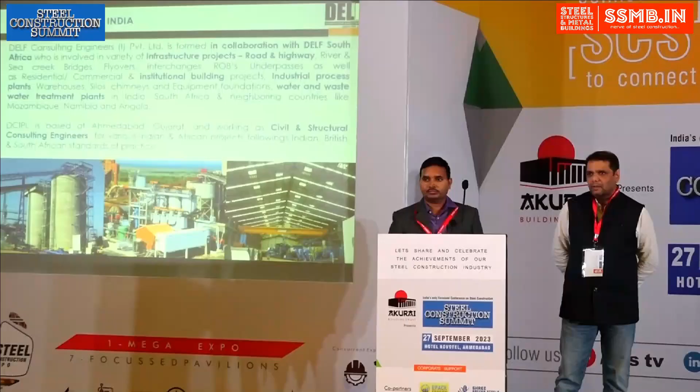Herewith we are presenting one of the state of art and first of its kind projects located at Mundra, Gujarat. It is a 2 gigawatt ingot and wafer plant at Mundra, developed by MSTPL, Mundra Solar Technopark Private Limited. It is part of Adani's Solar Electronic Manufacturing Cluster Zone, a complete backward integration of complete solar solutions, and it is like making India self-reliant in solar projects, an initiative taken up by Adani Group.

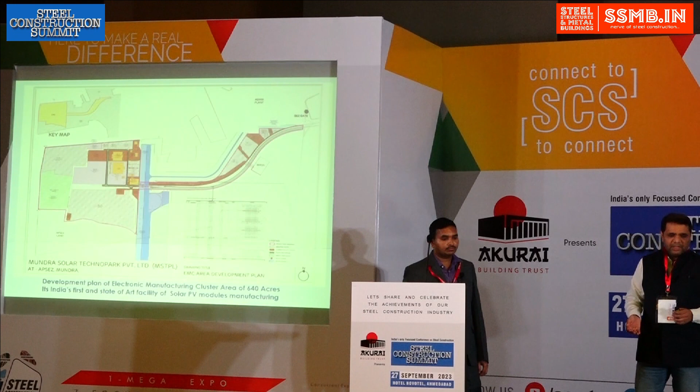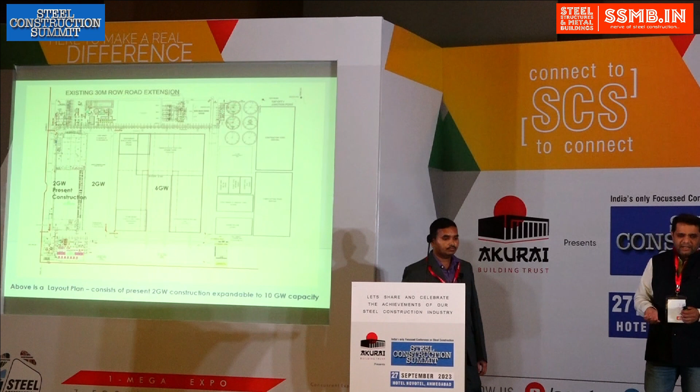This is the entire development plan of the EMC cluster, where this ingot plant, the main EMC facility, the glass factory, copper plants, aluminum plants, all structures are being developed. Out of which this is the ingot and wafer plant layout, where currently we are developing this 2 gigawatt plant.

What do you want to take back? Pointer.

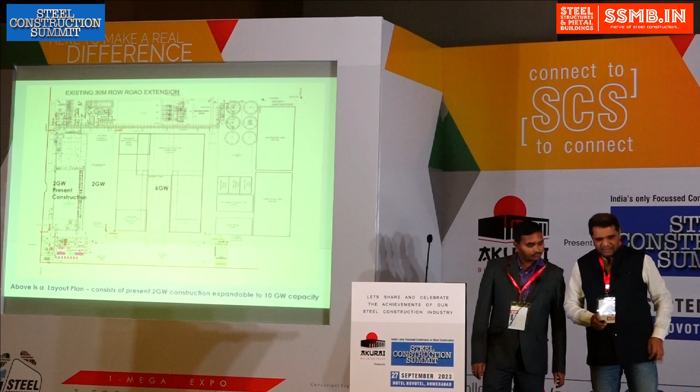The key challenge of this project was the time frame for detail engineering. We had to complete everything in 2.5 months, including day-to-day coordination with the client team and the technology partner, which is Kaide China. And we had quite a tough time due to language barrier and it being first of its kind setup in India.

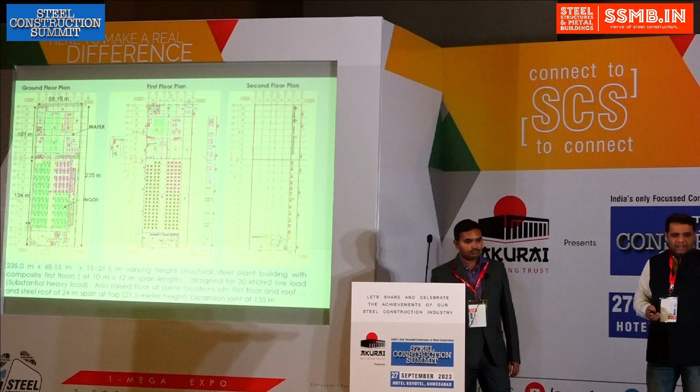This is like the floor plans of the main plant building, the ingot and wafer plant. Total length of the building is 235 meter by 68 meter, with an expansion joint at 135 meter, and quite a substantially heavy load of 20 kN per meter square at the first floor.

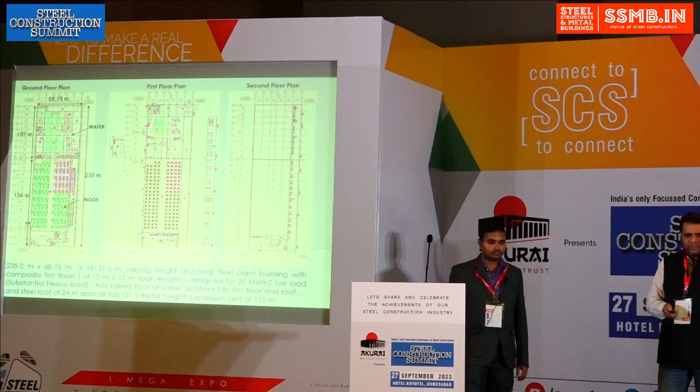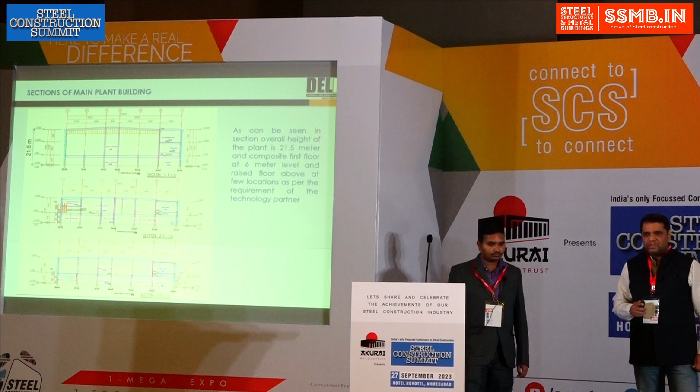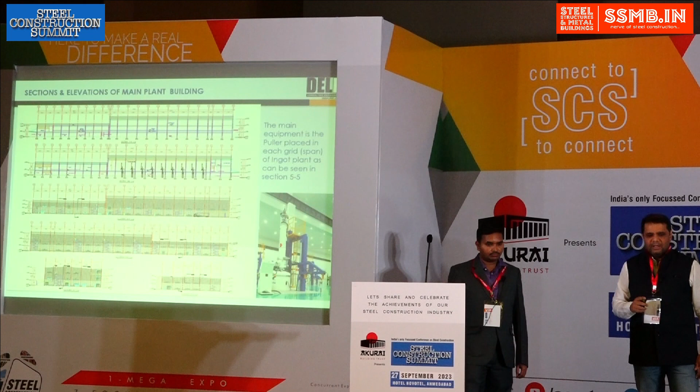These are the sections of the buildings where overall height is 21.5 meter, and at 6 meter the first floor is composite deck slab. These are further sections and elevations where the main equipment, the puller equipment, is located into the ingot plant.

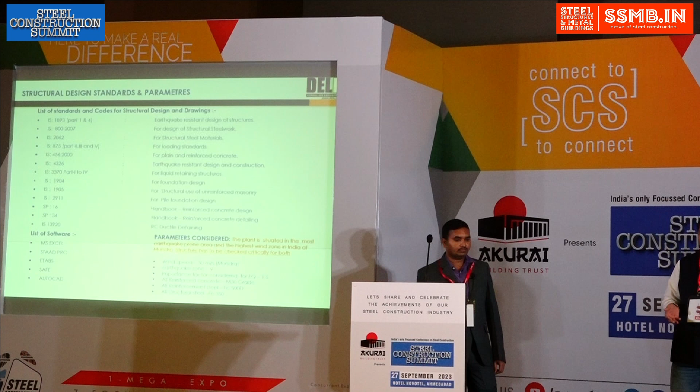When heavy loads are there, earthquake forces start governing, and when the loads are light, wind force starts governing. So not only from an earthquake and wind point of view, Mundra is also challenging from a soil bearing capacity point of view. Literally there is no soil bearing capacity available, so the foundations are deep pile foundations, and even construction has to be done with continuous dewatering process.

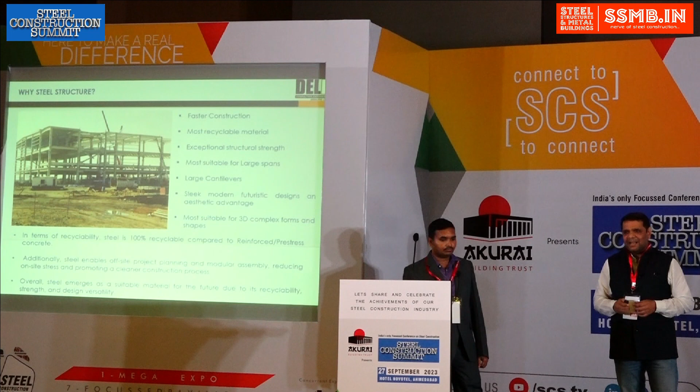Why steel structure? As already discussed earlier, it enables faster construction, it's the most recyclable material, allows large span, large cantilever, as well as 3D complex forms and shapes. All these things are possible in steel, where concrete has limitations.

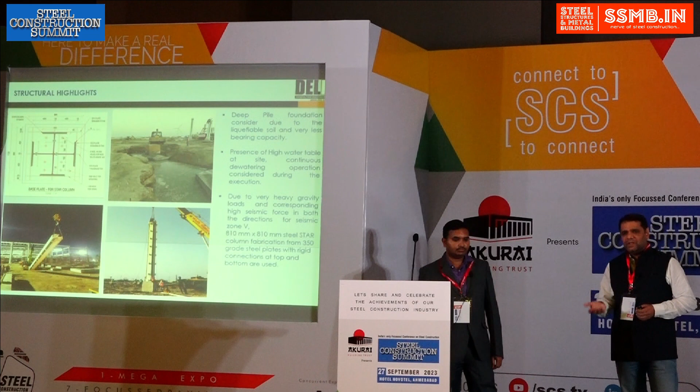The structural highlights, as already conveyed, deep pile foundations have been designed for the foundations, and we also have to keep in mind the water table during execution of the work. Due to very heavy gravity loads in the entire plant at first floor level, the corresponding seismic forces were also quite high, so we had to adopt fabricated star columns from 350 grade steel plate. Our column sizes are in the range of 810 mm by 810 mm, with flange thickness up to 30 mm and web thickness in the range of 16 to 20 mm.

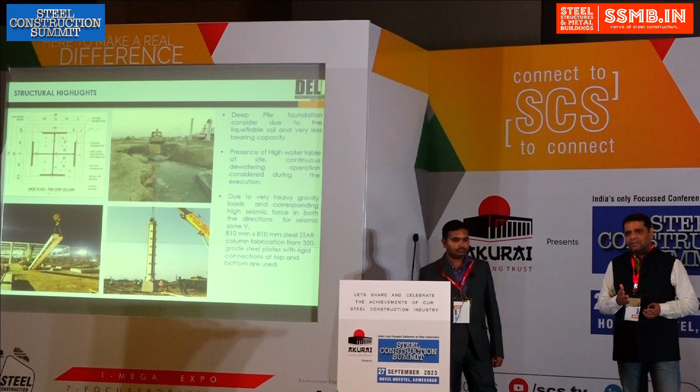Even the stability of the connection was a key concern, so we had to introduce a shear key in the base plate system to control the checks related to seismic horizontal loads.

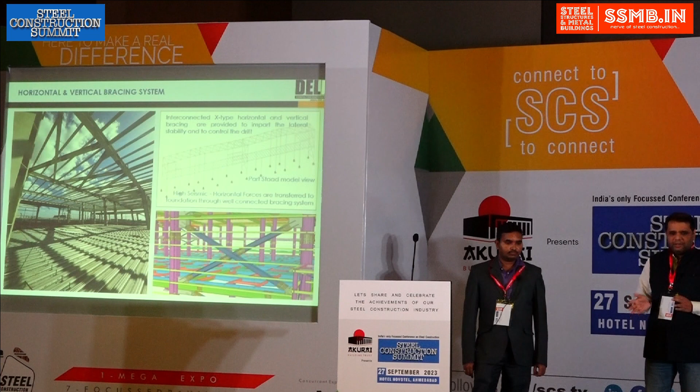These are the main beams and related planning, with an optimization perspective for secondary beams. The planning of horizontal and vertical bracing is interconnected for transfer of horizontal force to the foundation, along with the composite deck system.

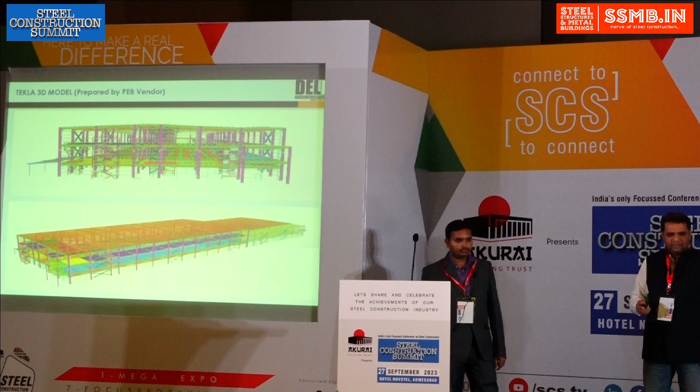These are the latest images of the project site, and these are the TEKLA models prepared by the PEB vendors. These are the coordinated 3D models with the equipment in place, with a few glimpses of the connections. We also have a 1 kilometer long pipe rack in this project.

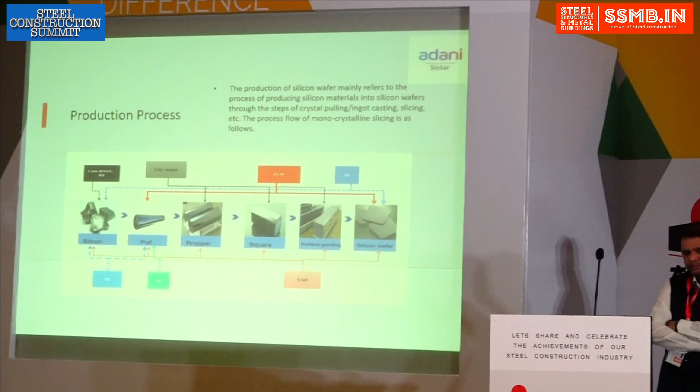In the ingot wafer factory, ingots are produced, and those ingots are cut into wafers. Then it goes to the assembling factory for cell and module. This is the actual process: first the raw material silicon is pulled into what are called ingots, cut into cylindrical objects, and then squared with monosquarers. After that the surface is totally grinded and polished, and the wafer is cut from that.

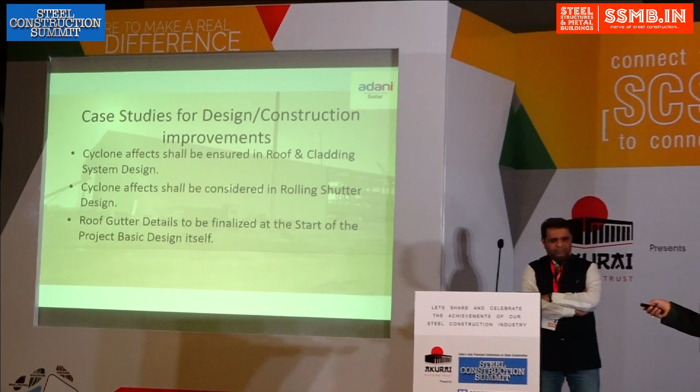There are 3 case studies I have made for this project, covering the challenges faced due to the Biparjoy cyclone. Some part of the roof was damaged due to this cyclone. This cyclone effect should be considered in the roof and cladding system design at the initial stage. Mainly we focus on the structural part, but sometimes we don't ensure the roof, cladding, and openings design, which is actually the most important part of cyclone design.

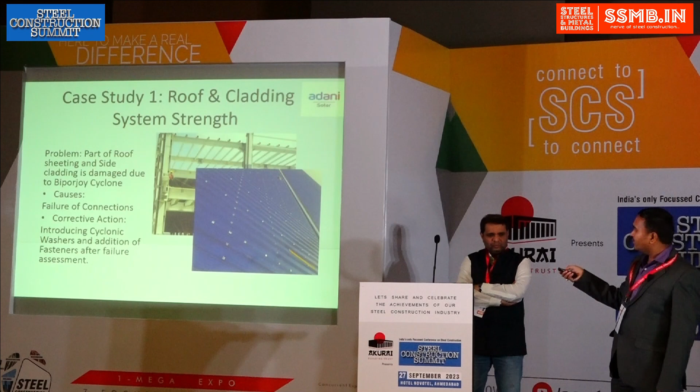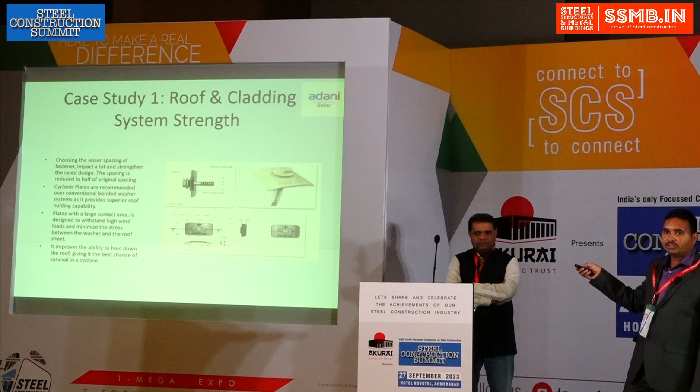For the roof and cladding part, some of the roof sheeting was drifted away due to the cyclone. So we made a corrective action with cyclonic washers, and the spacing of these fasteners was reduced, and we reinstalled the damaged roof sheet.

The same happened with the rolling shutters. Some part of the rolling shutter was drifted away due to the cyclone effect, so we took additional precautions in the design. The rolling shutter was designed for 50 meters per second, but that was not withstood, so we respecified it for the new shutters and included additional safety features.

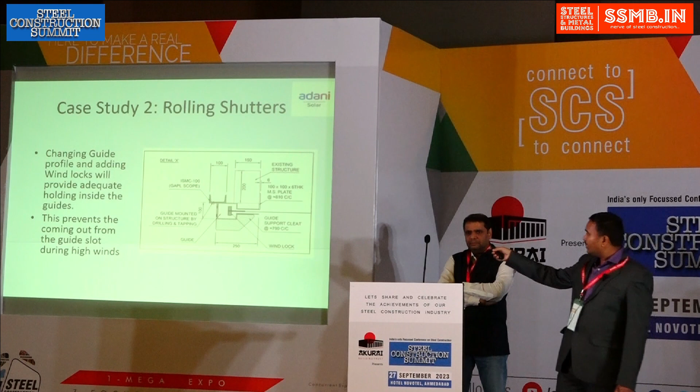This guide channel shape was modified, and we added wind locks. At the bottom we provided an additional angle to the actual frame of the base plate, to prevent any bending.

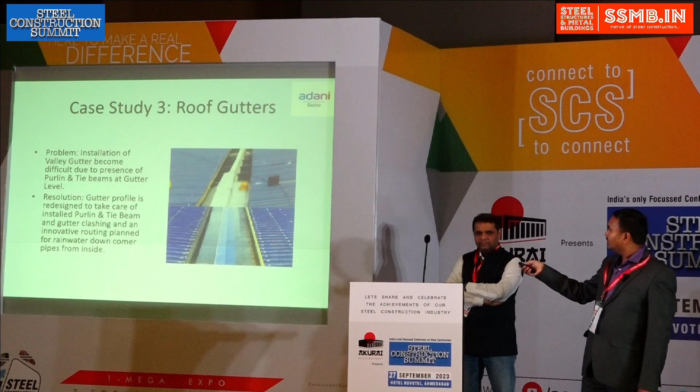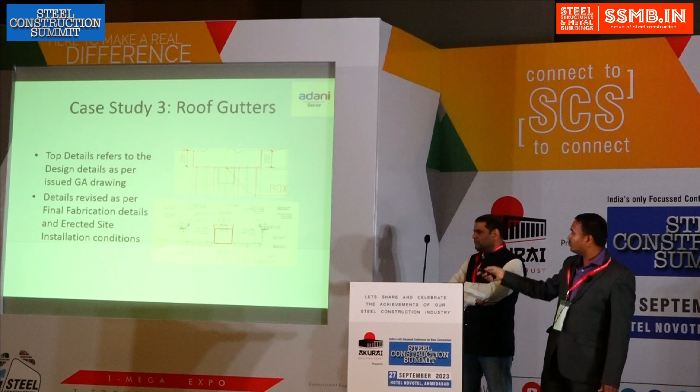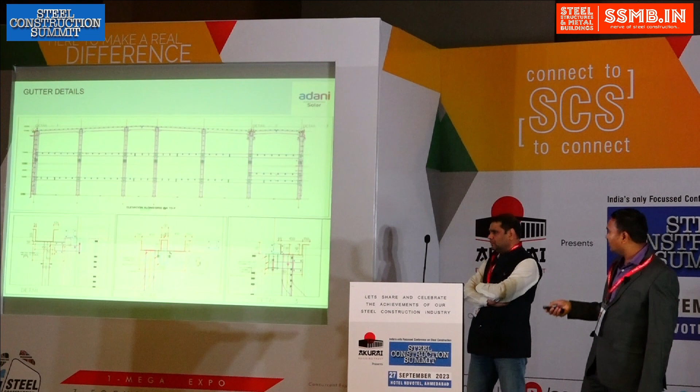Coming to the roof gutter, there was an issue present during the installation stage. In the actual design stage, there was only a tie beam above, with no purlin initially. But during fabrication, we found a purlin there, which made forming this gutter difficult. So we again modified the profile of the gutter, introduced a support frame accordingly, and made the gutter shape with respect to the existing sheeting arrangement.

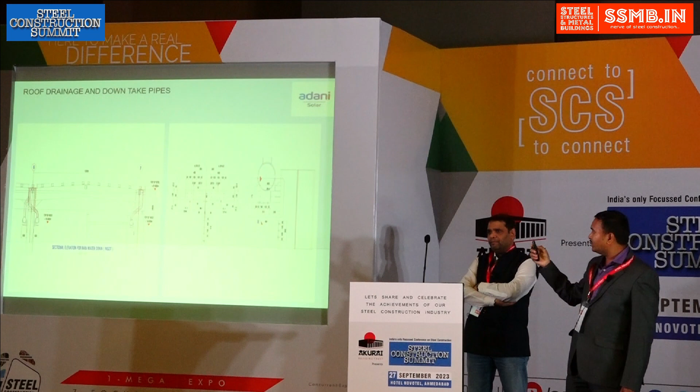All this rainwater is taken from the inside of the main building. Normally for the valley gutter it is a difficult challenge, so we made two pipelines which were taken outside and brought down at the end of the gable end.